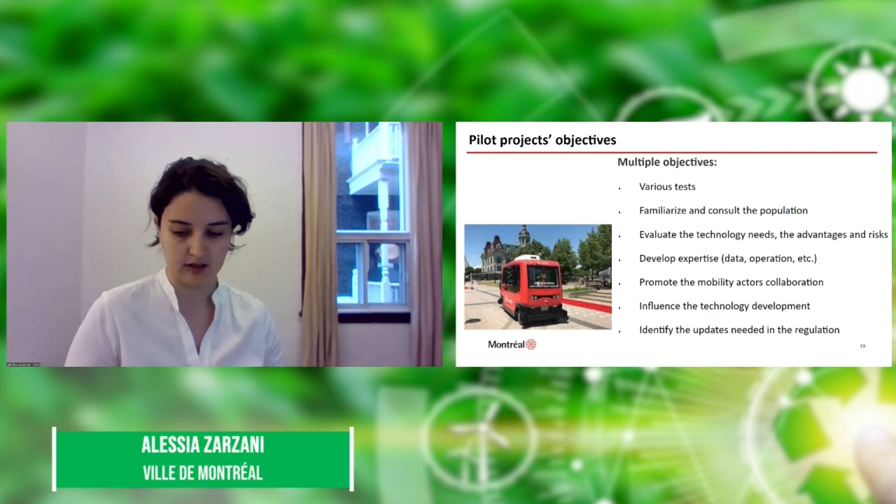So the city developed 3 different projects: the first in a private site, the second in a residential area, and the third, shown here, in a commercial street, Plaza Saint-Hubert.

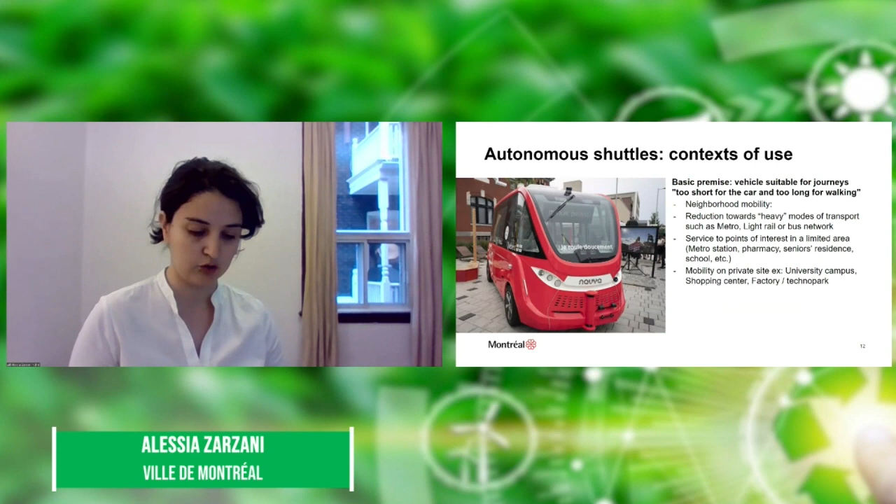The autonomous shuttle's basic premise for this technology, and why we tested it in the commercial street, is because the trip needs to be too short for a car and too long for walking. So we developed different phases for the project.

The preliminary part is in collaboration with the MTQ for the security of the trip and the zone of the pilot project. The first phase is to better understand the technology, and it's right now in the street. The second part is to better understand citizen usage.

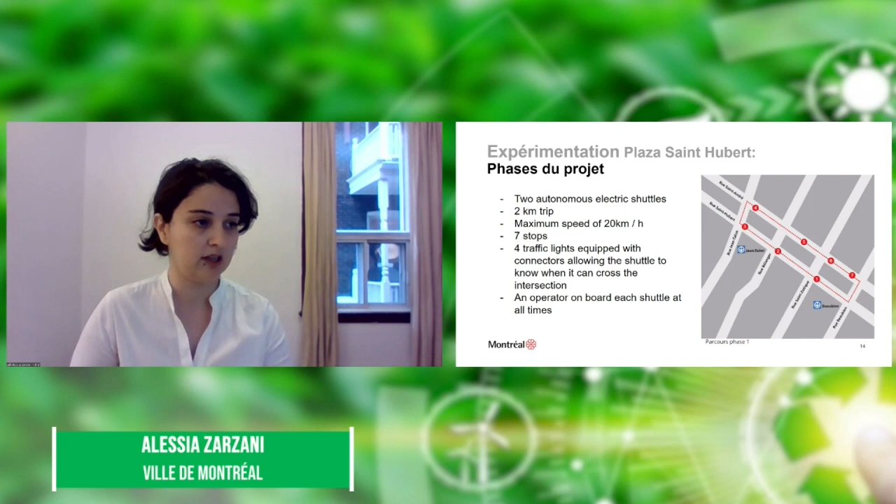So this is the zone. We have two autonomous electric shuttles, a 2 kilometer trip, a maximum speed of 20 km/h, 7 stops, 4 traffic lights equipped with connectors to allow the shuttle to know when it can cross the intersection, and an operator on board each shuttle at all times for security.

So to allow citizens on board, we used COVID mitigation measures for this phase.

So when you come to Montreal, we will be glad to welcome you on board.

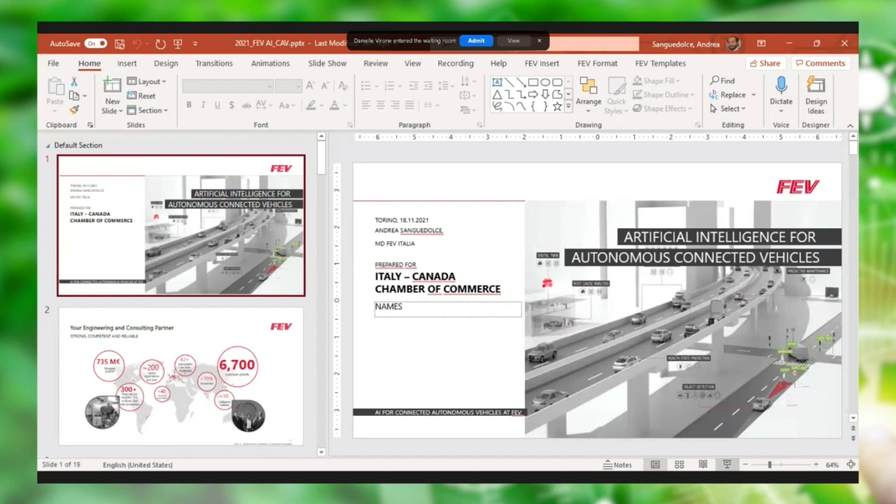Okay, perfect. So good morning and good afternoon, ladies and gentlemen. I would like to thank the Italy-Canada Chamber of Commerce and Regione Piemonte for giving me and FEV the possibility to share with you our vision about future mobility and artificial intelligence.

Let me start by presenting FEV at a glance. We are an engineering company, partner of many OEMs and very relevant tier ones and other players within future mobility development. We have a global footprint. Revenues referred to here are from 2019, since 2020, as you can imagine, is not a reference year.

But in this moment, the development for future mobility is really high among all our customers, so we are really catching up and even growing. We have more than 300 laboratories around the world to do our jobs. We are definitely an engineering company, so more than 70% of our employees are engineers, or in any case educated through university, with more than 200 patent applications per year.

And so we have the luck to work with all the important developers around the world, plus we have many internal projects. You see here how we operate.

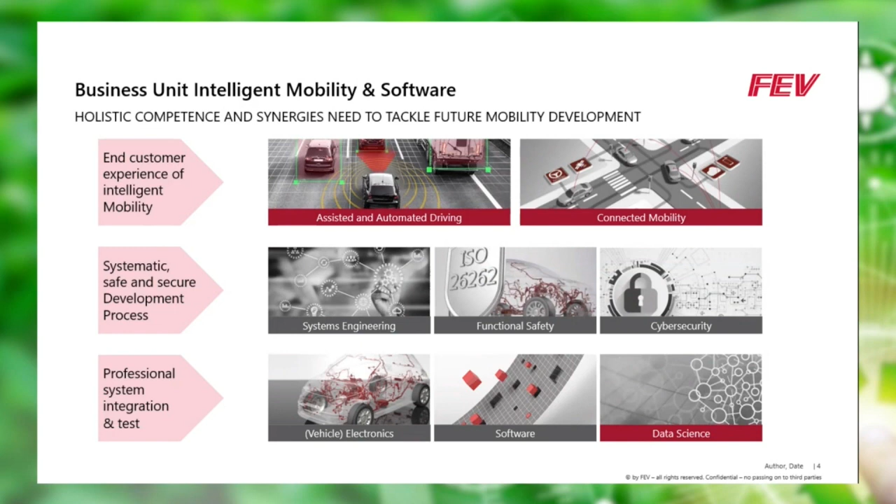We are talking about deep learning. Even for me, the difference is not so clear sometimes, but we say deep learning is when you use a model to predict something. Machine learning, you have model and data. And the big difference to reach artificial intelligence at our level is that it usually requires human intelligence. You want to reach the level where from the data you can extract value and decisions that can be taken by human intelligence. This is a relevant difference between machine learning and artificial intelligence.

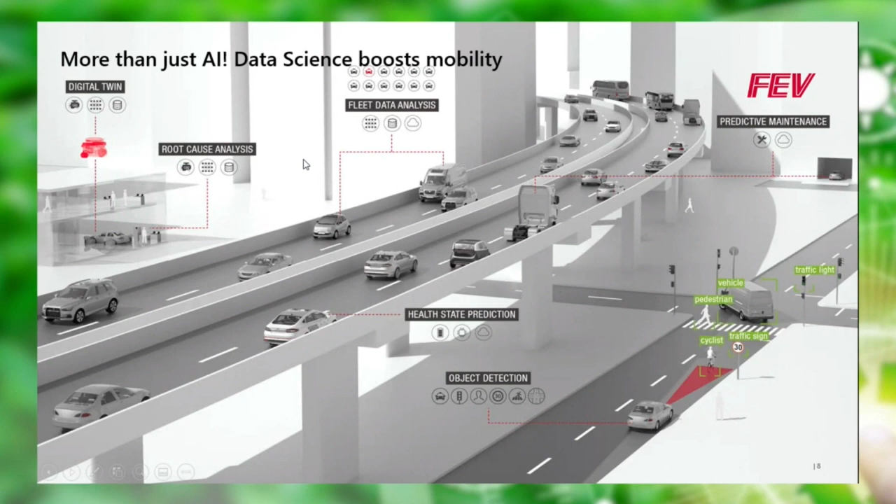This is just to visualize a bit some of the applications we discussed. This vision is a bit more cold than the one presented by Mrs. Zarzani, but you see different types of mobility, highway or urban mobility, and this requires totally different development in terms of functionality. But all these use cases need artificial intelligence as an enabler to arrive at the implementation of the functionality.

This is a bit more interesting. This is an example of projects. In FEV, as well as internal projects, we work for our customers. This is an example of testing and validation of ADAS and AD functions. We are talking about more than level 3. As we know, more than level 3 means you can stay hands-off for some time in controlled environments, for sure not in all environments, and even have your eyes not looking directly at the street for some time. To do that, you can imagine it's quite ambitious. From the technology point of view, they are available, but then you need to be able to test and validate that this can be put into production, and that the customer is safe using it.

An example: you need to have prototypes for sure. Sometimes you collect a lot of data, but then you need a kind of digital twin or platform where you identify your driving scenario. That can be downtown Bologna. We have, by the way, in Bologna, a laboratory developing this kind of functionality. We are doing some work with the city, and there we are modeling in some way the scenario of downtown Bologna. Then you need to identify corner cases, weakness detection, and so on.

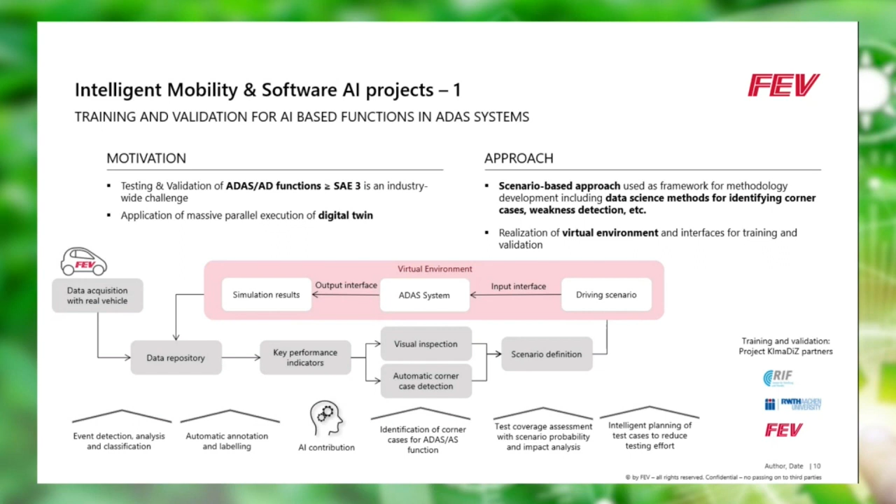To do that, we acquire data, and then we use our virtual platform for driving scenarios. You have the input interface to the other systems, and the output simulation results. What you can do is improve your functionality, and the loop can go again and again, saving a lot of time on testing that would otherwise be done in real life. Prototypes are very expensive, so we move this into a more virtual environment.

So this is something that we are testing and that we will see for sure in the future.

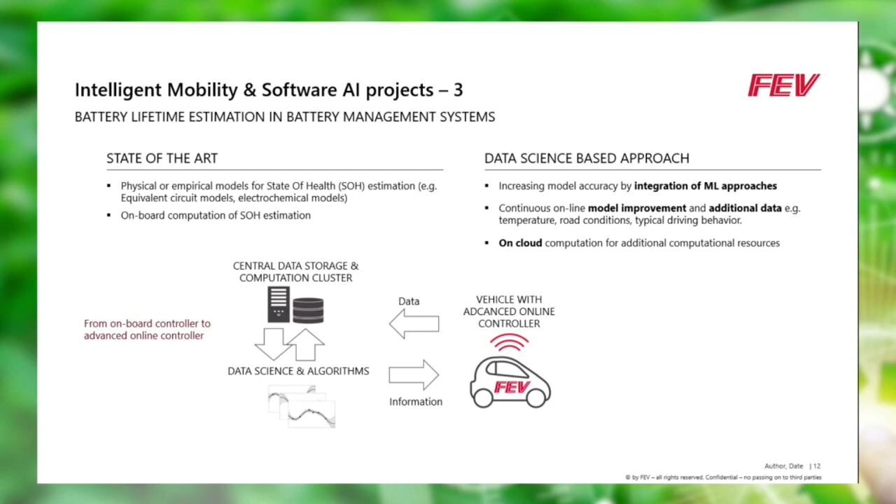This is very important because, for example, imagine that one day, even today, you have a hybrid vehicle in some downtown city, and there's a geofencing zone. When you pass this geofencing, you can deliver information about your range and state of charge of your battery, and then they will decide if you can enter or not, based on whether you have enough range to drive in the city without any problem.

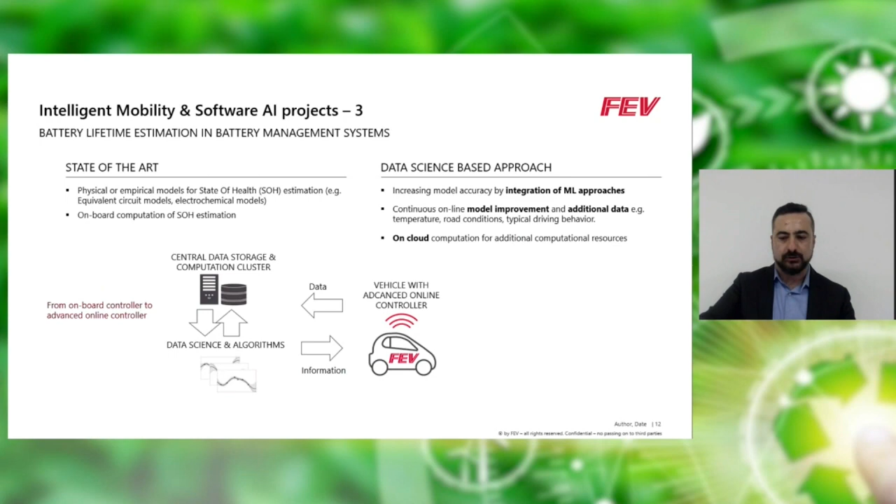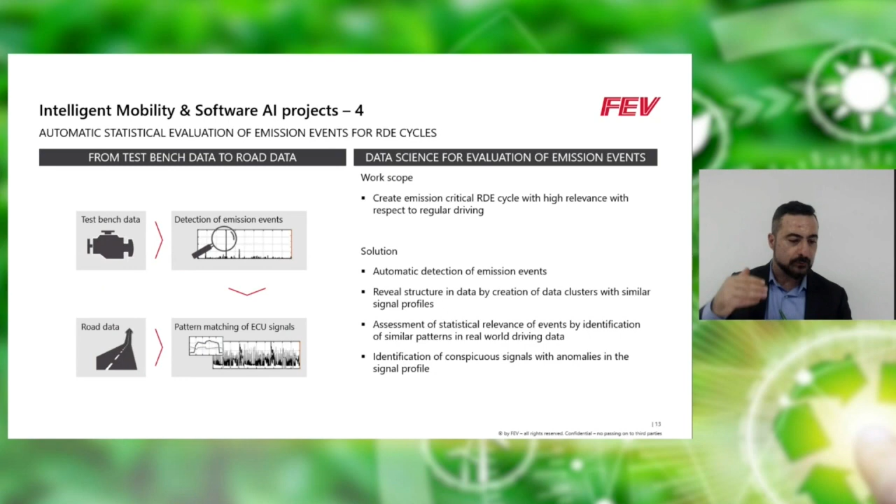So there are really many applications related to this functionality. This is an example related to development. We use this at FEV to analyze engine test bench data where we test the powertrain, and then data coming from the vehicle we test on the road. We can put together this data, and with the right modeling and artificial intelligence support, we can shorten the development time and come to a conclusion to improve the functionality much better.

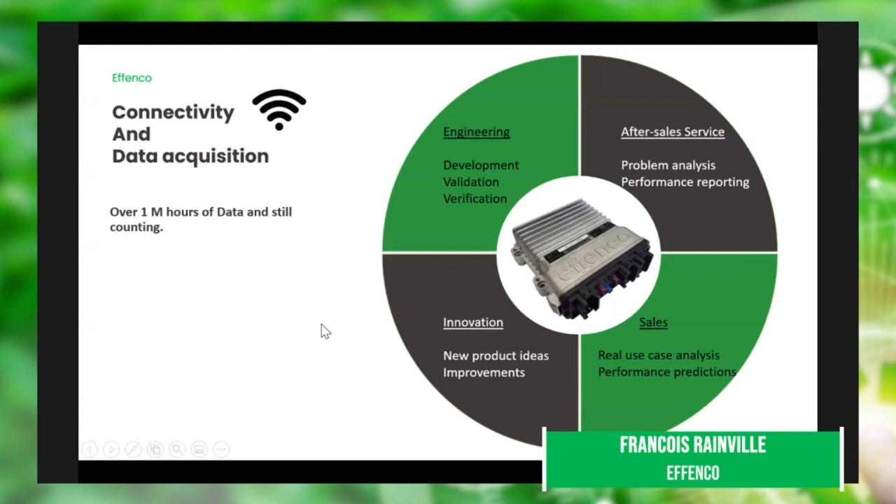As you probably all know, one of the big challenges with artificial intelligence is to have access to a lot of data and quality data. At EFFENCO, we started collecting data on vehicles more than 10 years ago because we were a very small team at the beginning, and our market is worldwide. We needed a way to monitor the performance of our systems, as well as reporting the performance to the customers. We can also do real use case analysis for future customers that might be interested, and we also use data for innovation.

In these 10 years, we have collected over 1 million hours of data across more than 150 channels at 20 times per second. We have connected 400 vehicles at the moment, and it's still counting. We reached 1 million just in September. It's a fun fact.

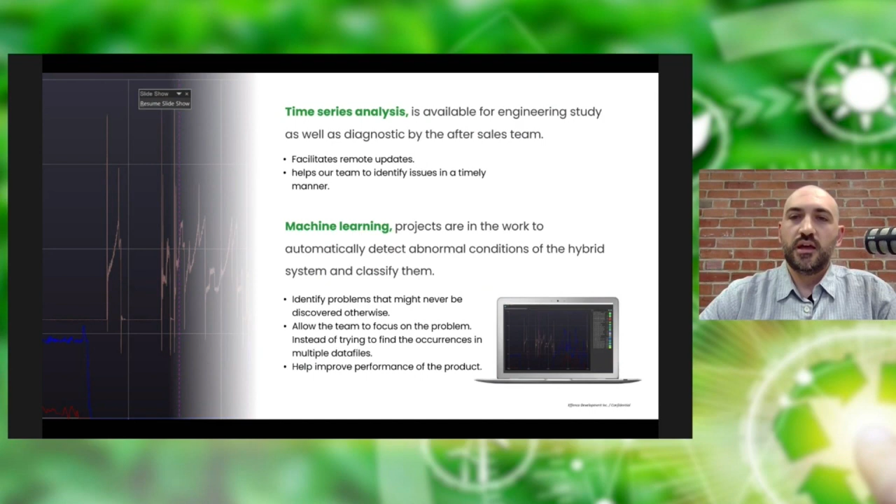The first area where we use data is the after-sales service. Our service technician and engineer team needs a way to identify problems either on the system or on the vehicle. The data is really the best tool for them to find issues when working remote from the customer location, and they can pinpoint the problems and send the right tools or the right parts to do the fix to the destination.

We can be more efficient this way. Because the system is connected, we can do remote updates, and it helps a lot on the deployment of different fixes. We are currently working on a machine learning project to detect abnormal conditions in our system.

We have a decision tree algorithm that is classifying them, and then the service engineer can first look at this results and identify if it's a known problem or if it's a new problem. Then we can focus the right resources to address the issue.

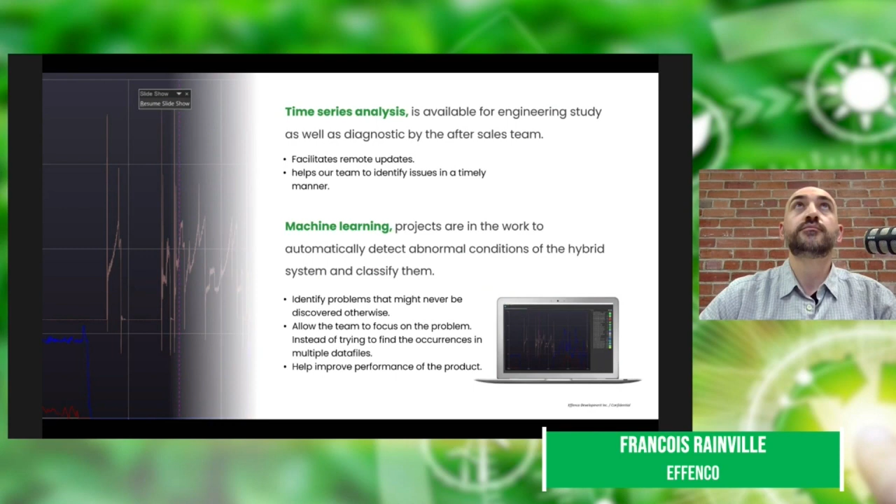Another very important use case for our data is the performance report for the customers. Because we have a new technology, customers want to make sure that their investment was worth what they paid for. So we do advanced performance reports for them, and we can show that the system works, and it reinforces future sales with the same customers.

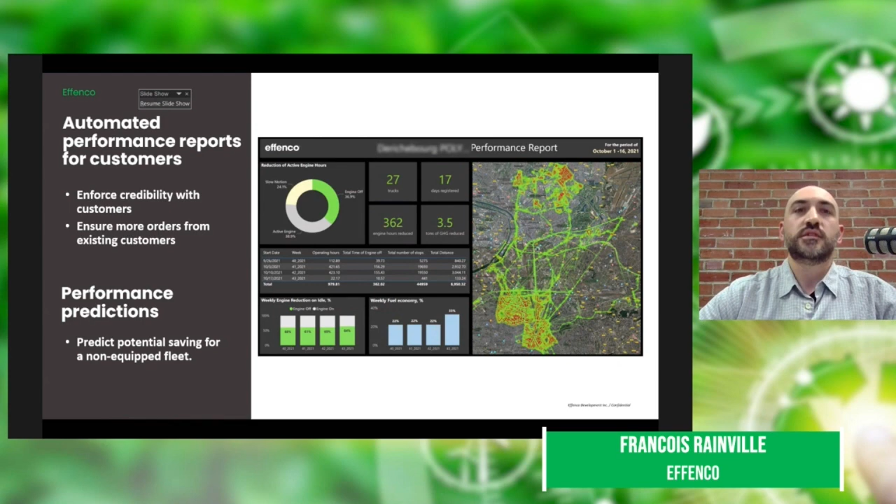So this is an example report that you can see. Sorry, I have a problem with my multi-screen setup.

On the engineering side, we are working on a future system that is a fully electric powertrain for a heavy-duty vehicle, but with a very small onboard energy capacity. The goal is to have a vehicle that is the same cost as a diesel vehicle, but emission-free.

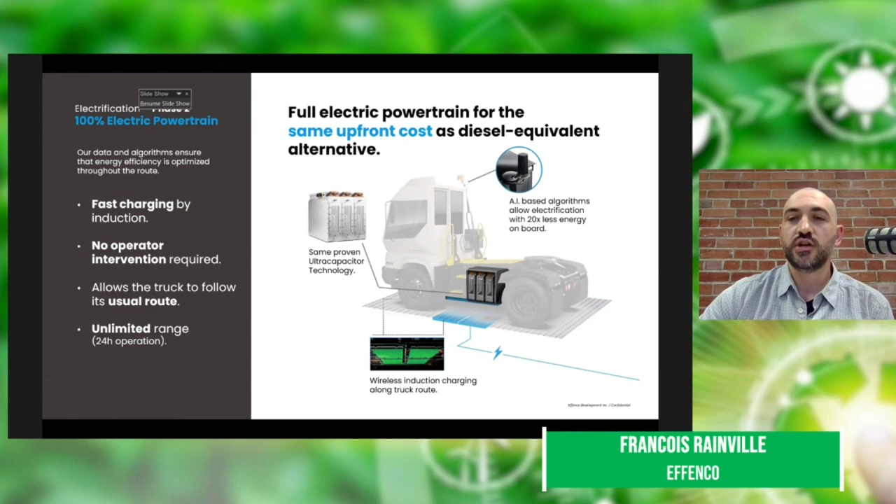So what we need to do for this is minimize the onboard energy, but we also need to charge the supercapacitor, which is our energy storage, very wisely. So we are working on an algorithm to place the charging station strategically, depending on the use case of the customer.

And what we provide as a solution is a path to fully electric. So the first step at 30% is just by buying the vehicle. And the 50% step is when we start to implement charging infrastructure to their fleet.

As time advances, we add more charging stations until the whole fleet is 100% carbon neutral.

So this is kind of an explanation of what this algorithm is doing. We use the collected data to simulate what would happen in different charging locations. We do some optimization. Once the solution is chosen and it matches the requirements of the customer, we can implement that on the fleet.

And once it's implemented, we continue refining the model, and we work on the next steps in this path to the fully electric fleet. So let's say the first year he has a specific budget, we could implement 10 vehicles.

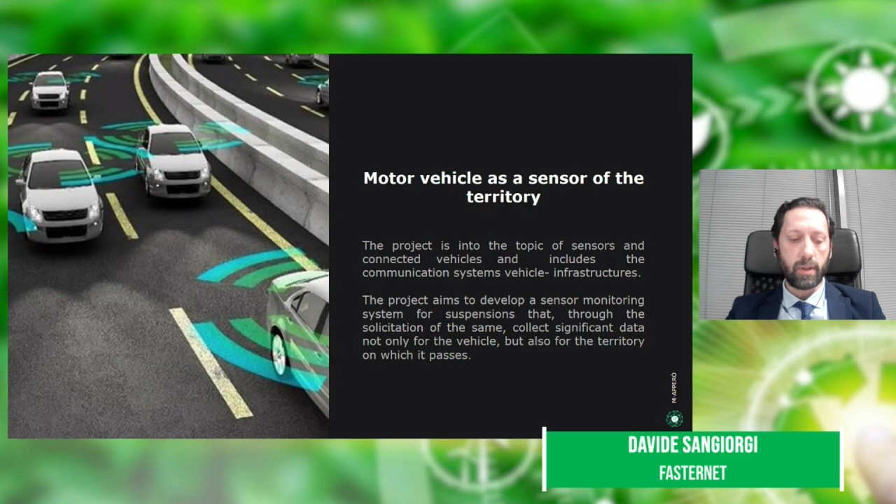The project aims to develop a sensor monitoring system for suspension that, through the solicitation of the same, collects significant data not only for the vehicle, but also for the territory on which it passes.

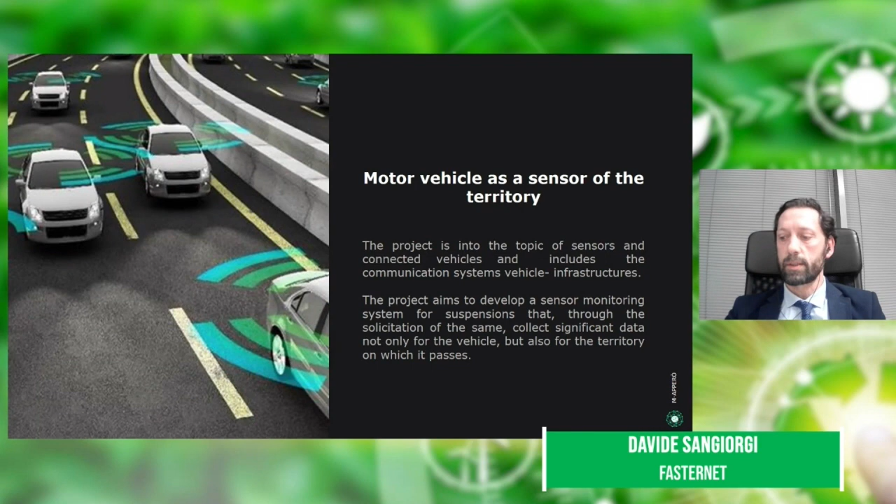The goal is the use of motor vehicles as a sensor of territory, and the use of motor vehicles as provider of big data. Black boxes and other devices are used to process and store real-time signals, especially from accelerometer sensors.

The test is done by the province of Brescia, and many data are collected from vehicles through data providers. The partners of the project have installed sensors into several vehicles and/or use data collected by sensors to validate the method of the province of Brescia.

Big data are used to support decisions to improve safety and sustainability, optimize maintenance costs, and develop the infrastructure for the interaction between vehicle, infrastructure, and environment.

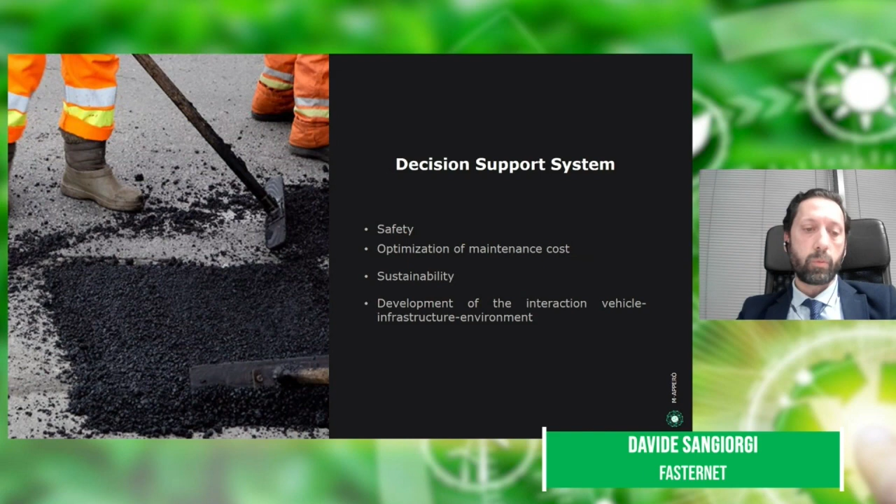All the data are collected and orchestrated in a known cloud system. The choice is to use a cloud orchestrator system to improve independence from the data managers' providers. Data collected and analyzed provide a wide range of information, increasing the added value of the single information. For a better representation, data are aggregated through tailor-made solutions according to the customer experience.

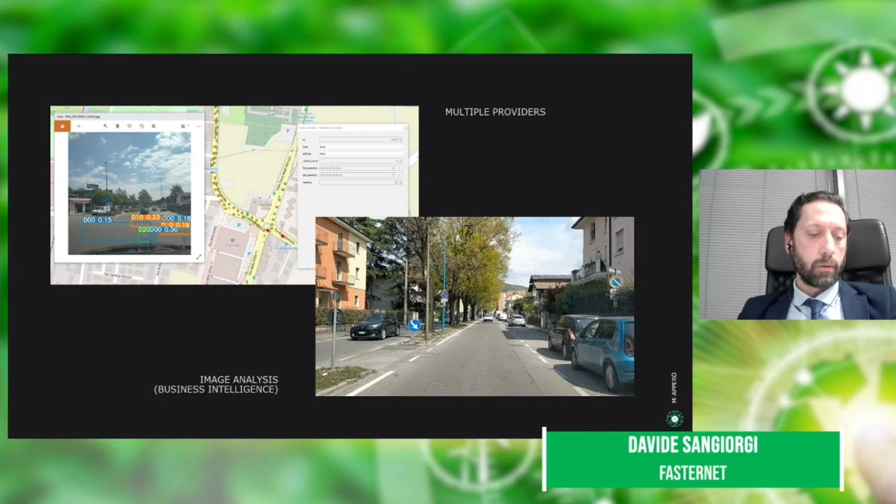In this slide you can see another sample of GPS data collection. In this part of the road, there are several images collected on the base map. The system includes an application to report the image.

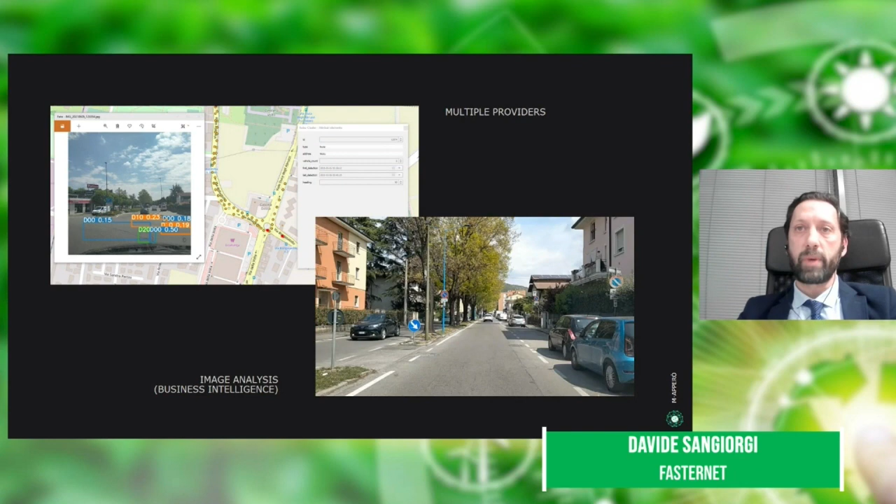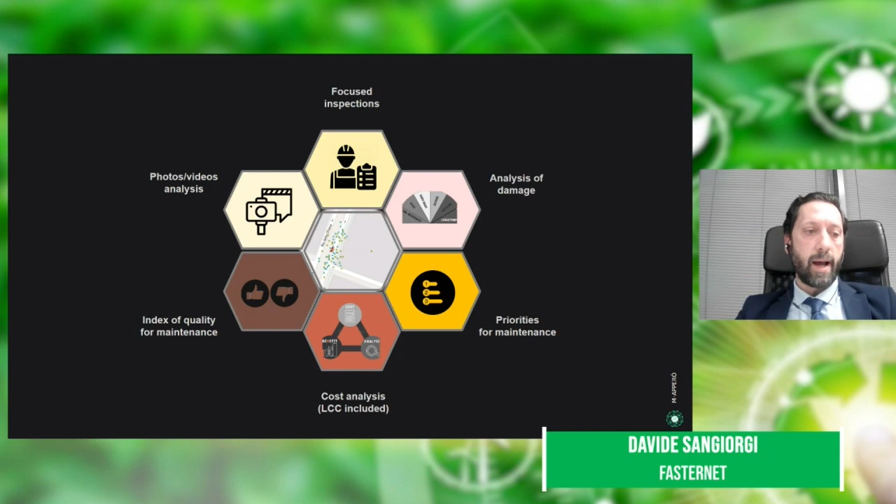There is not only accelerometer data, but also data coming from the analysis of images. Images are taken through an application based on AI that frames the road surface. Not only the analysis of the image, but also a complete set for road maintenance are included in this system.

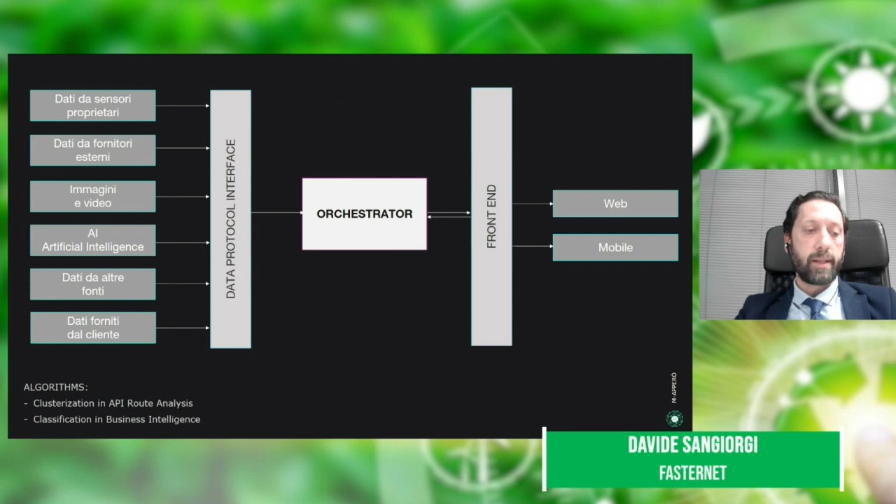The collected big data are provided from different sources. The elaboration of data is done by the orchestrator, which permits the use of algorithms such as clusterization of data. The position of data is corrected by this algorithm, and they are collected on the exact point of the road. The orchestrator returns the information to the mobile app or web interface.

We would like to promote a service of data collection through sensors that interchange with the infrastructure road system, to improve the quality of life of the city and, in general, the whole environment. The system will be, in perspective, open and shared.

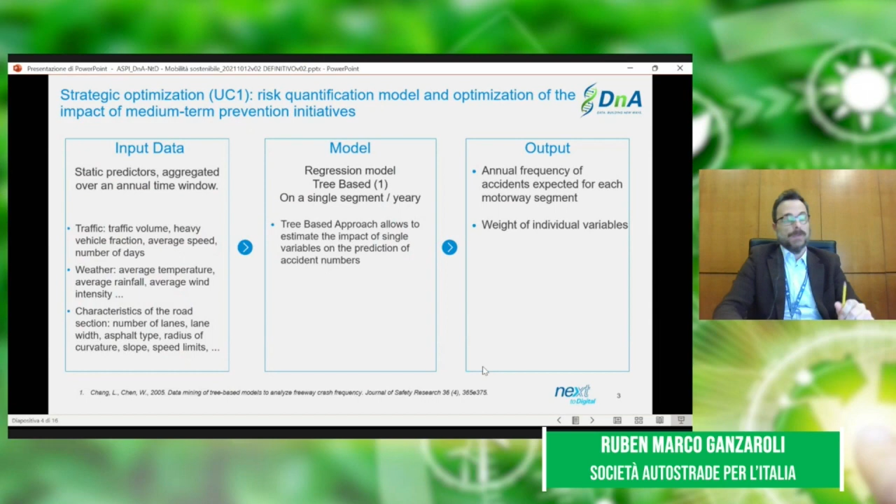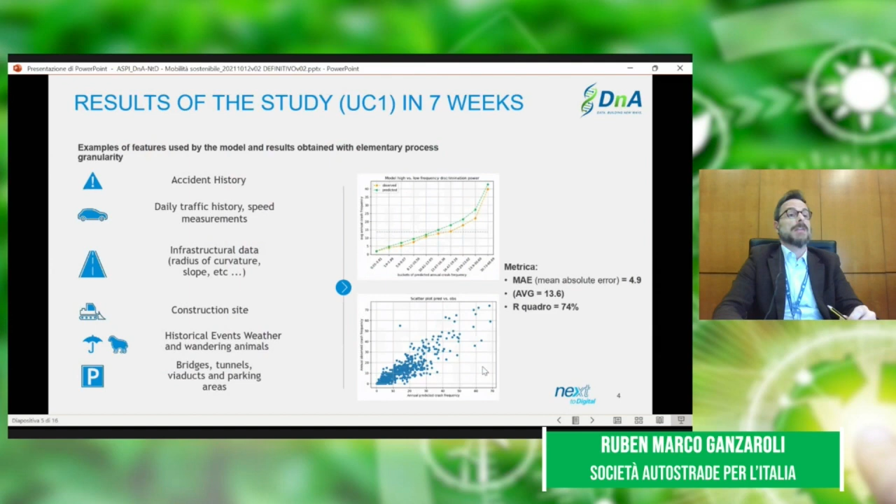In 7 weeks, we obtained as a result a mean absolute error of 4.9 points versus an average error rate of 13.6. So it's a quite good result.

But above all, we are able to understand which feature impacts the most the accidentality on our roads. As you can see, for example, the quality and the volume of the traffic are important features.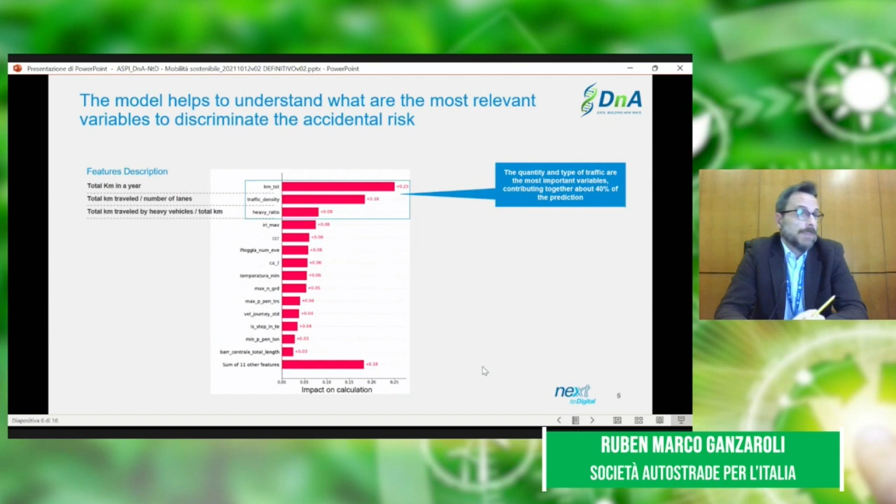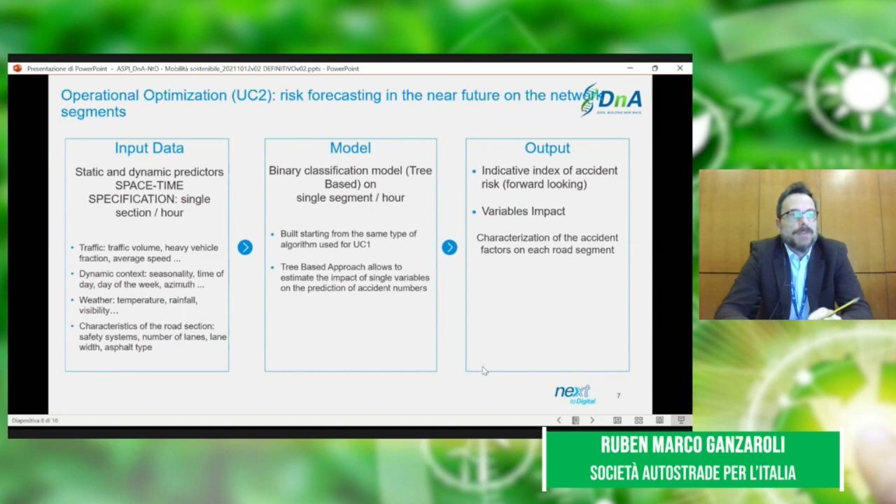And again, we wanted, of course, to have the accidentality risk forecast on a specific time frame and the variable impact again. So basically, if we wanted today to forecast the accidentality index on a specific street for tomorrow at 4 p.m., we just input the data.

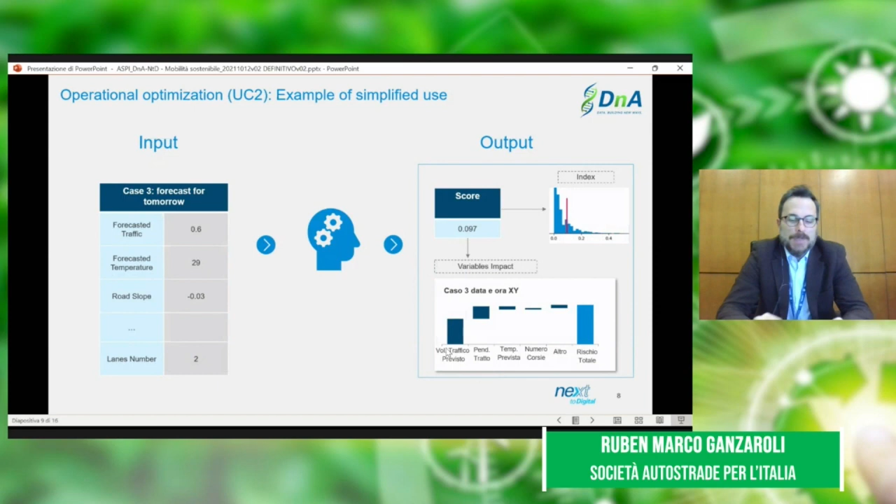Forecasted traffic is basically the forecasted volume. Forecasted temperature, 29 degrees Celsius, the road slope, the lanes number, and we can have the accidentality score pegged on tomorrow, on that road, tomorrow at 4 p.m., pegged by each variable, pegged by the impact of each variable.

And another interesting feature of this tool is that we can have a complete map of our infrastructure. In the example, you can see a map for 3 days. It's not Tuesday, of course, it's Thursday. Sorry for the typo, but you see from Thursday to Saturday all the motorway infrastructure based on our sections.

Of course, the graph is navigable so that you can deep dive the analysis when you see red, for example, in order to understand if there is something that you can do to reduce accidentality risk in that specific time frame.

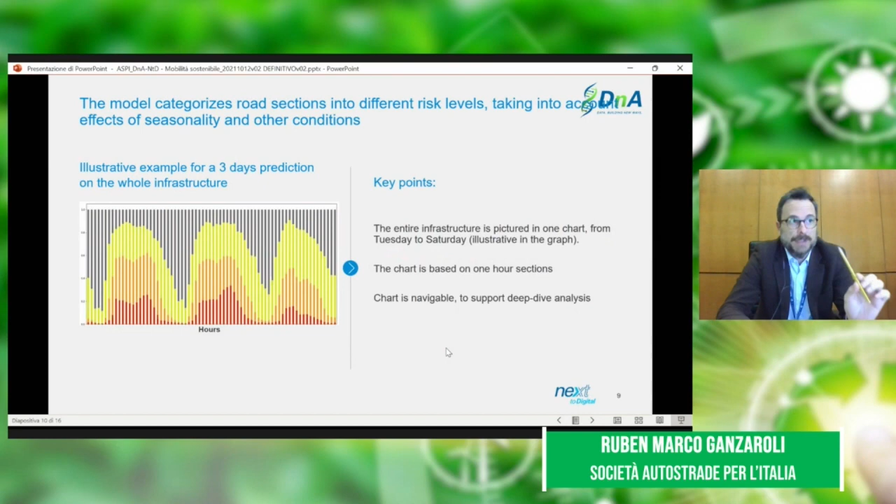Of course, this is the starting point, but we are developing the full environment because it's our core environment. So basically we can use this tool to boost flooring maintenance, supporting the identification of sections to improve quicker due to accidentality, construction site planning, and accident management.

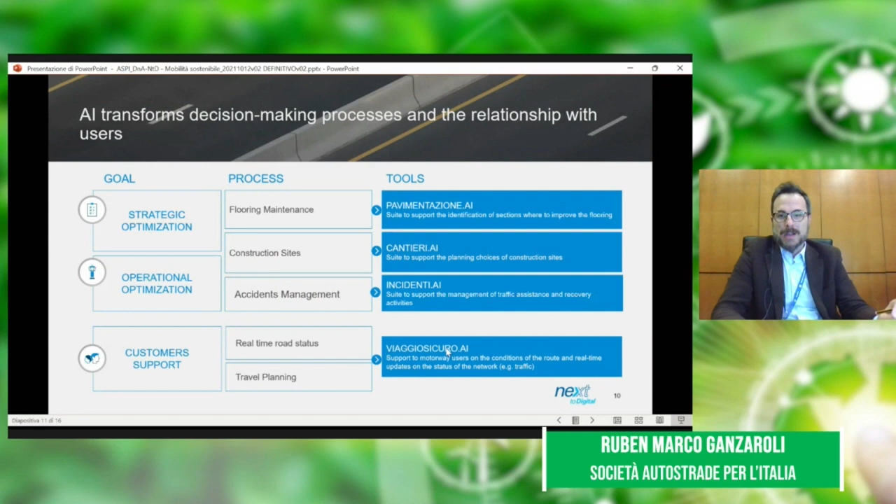Imagine that if you can foresee that on a specific road tomorrow the accidentality risk is higher, then you can put a safety car in that area ready to catch and support a potential accident. Then, of course, customer support, because we want to give our customers the real-time road status and allow them to schedule their journey so they are comfortable and smooth.

Of course, we have other use cases, not only about accidentality. We have expected travel time, which is basically a name, but the tool is something deeper regarding traffic analysis. We have a lot of data about traffic and can integrate this data with other features to understand each aspect of our core business. This can lead to estimating the impact of each feature and putting in place actions to reduce the impact of whatever we perform or whatever issue we could have on our infrastructure.

Of course, we are doing a lot of KPIs. We have a huge number of financial KPIs and a huge number of HR KPIs. We are also collecting and managing automation of KPIs for asset management so that we have navigable maps, so that we can optimize the travel of our company cars.

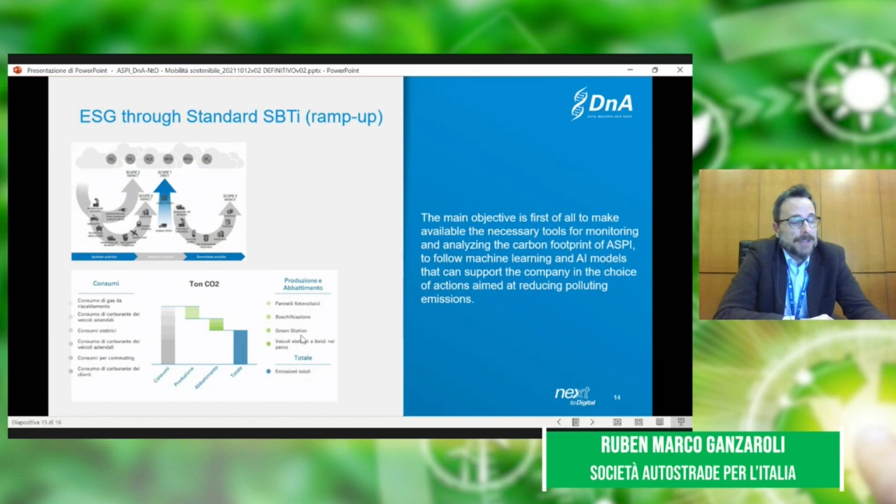Well, that's all—10 minutes are not so much, but well, it was very insightful. Actually, it's a very practical demonstration of how you use the data coming in from your infrastructure. Thank you very much.

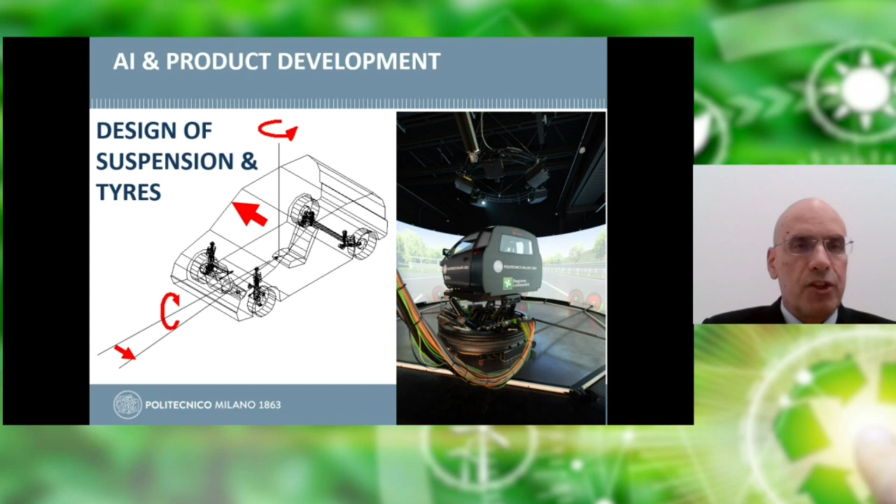Okay, let's come to the AI topic, which is the topic of this session. Actually, we started using neural networks and machine learning techniques to design the suspension systems of cars, starting even more than 20 years ago. Of course, the computer programs at that time were not so powerful as the ones we have today, but we did manage to tune the suspension systems of both current production cars and racing cars, Formula One.

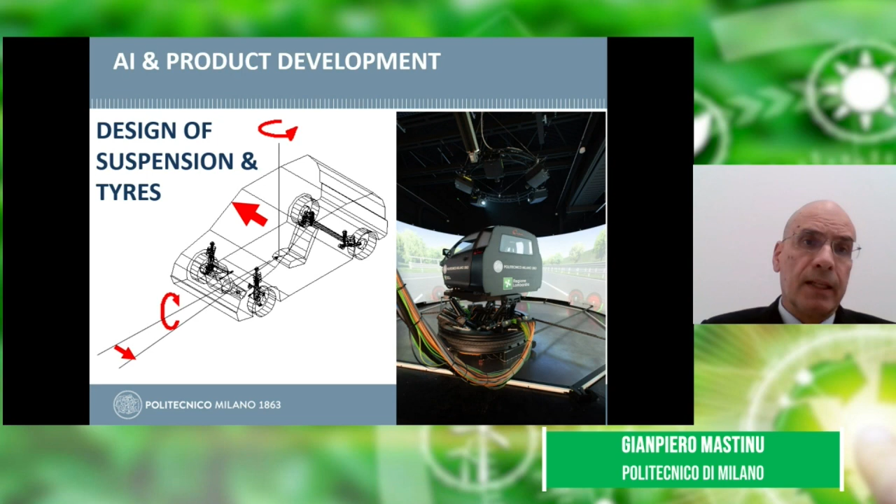The topic here is to design the suspension taking into account a number of different parameters and tires at the same time. Of course, nowadays we use a driving simulator in order to include the actual subjective feeling of the driver.

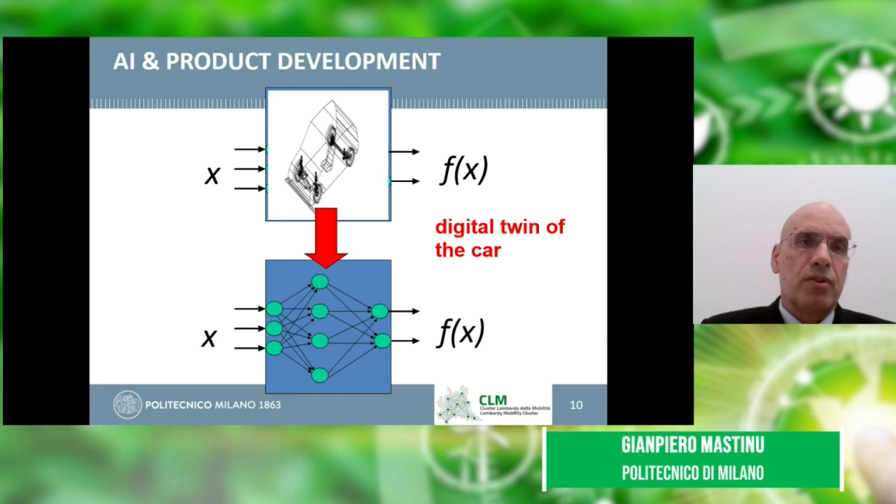What we do: we substitute the physical model of the car, derived by writing a number of equations coming from the mechanical model, with a simple neural network that establishes the same relationship between the design variables of the suspension system and the objective function or performance index. So by means of the neural net, we have the same relationship between the design variables of the suspension system and the performance index of the car.

Let's come to the results. In one of our last exercises, we managed to optimize 72 parameters describing both the suspension system and the tires, considering 38 different performance indexes that refer to active safety, comfort, noise, and subjective feeling of the driver. This, of course, is possible by resorting to AI only. A normal designer is not able to cope with and consider all of this complexity in one shot.

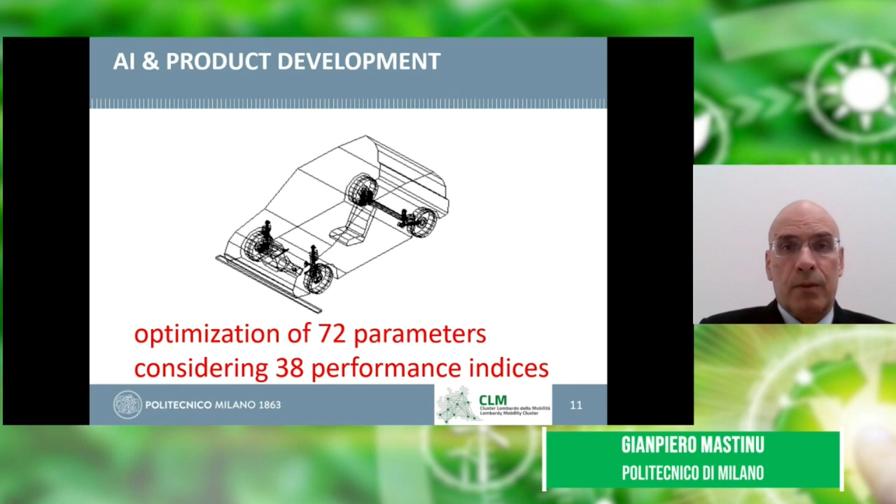Okay, so AI is also very much important in process development. There are a number of companies nowadays in Lombardy that establish a relationship between product and process by means of digitalization and AI.

Let us imagine that a component must be derived. I will not mention the component for confidentiality reasons, but let us imagine that we insert a sensor into the component while it is produced. So we can use the sensor for monitoring the production, and the same sensor can be used during the service life of the component.

During the service life of the component, the sensor will continue providing data, and by means of AI, important information on how the component is working can be obtained. This data can also be used to improve the design of the next generation of components.

This triangle has proved to be really very effective in order to reduce production cost and increase the effectiveness of the component, in terms of ability to define the actual behavior of the vehicle and the component itself.

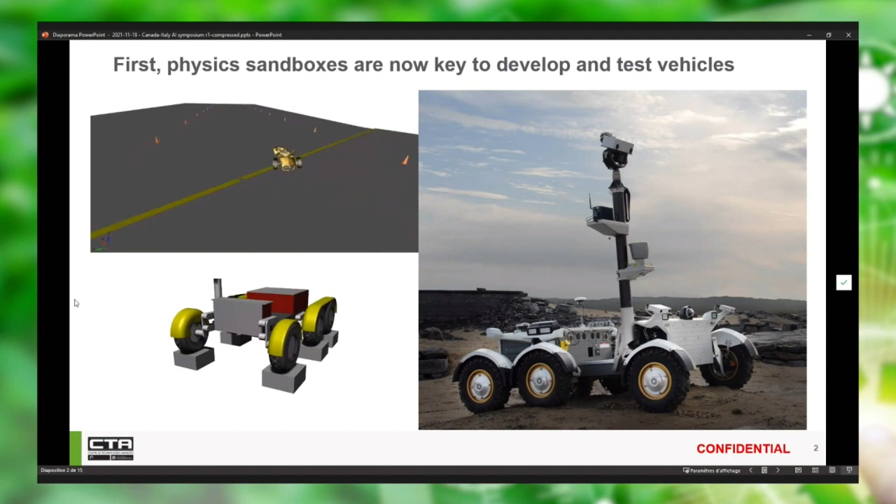Very good. So physics sandboxes are now key to develop and test vehicles. On this slide, I'll just resume and restart the first video. In the first video, you see a Can-Am Spyder moving around on a track. What's interesting about this digital twin is that the frame is actually flexible, so we can recover the different loads in the structure, even though the whole suspension, the arms and the frame are flexing.

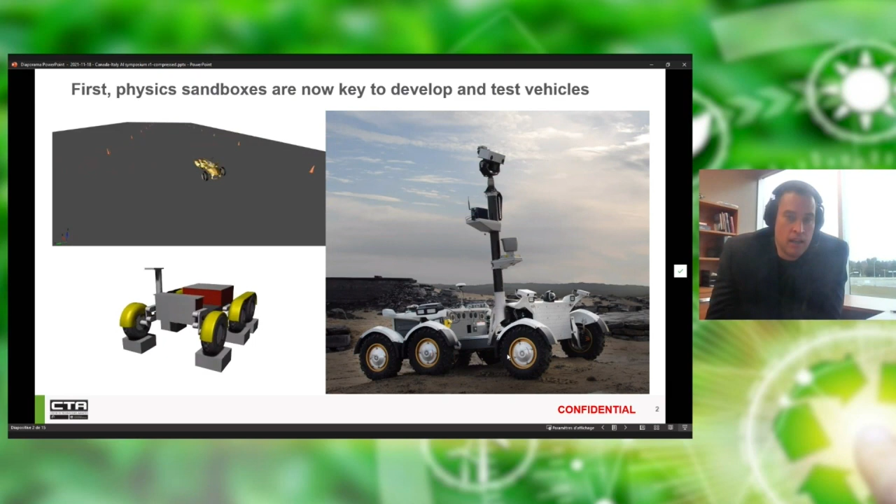That's quite important because it will affect very importantly the loads on the structure. In the second video, we see a rover that we built for the Canadian Space Agency where we do a virtual 6-post in order to determine the loads on the structure. We use these digital twins for many reasons, but one of the things we want to do is optimize vehicles—essentially design of experiment and optimization—so we can adjust suspension parameters and obtain the best trade-offs and performance.

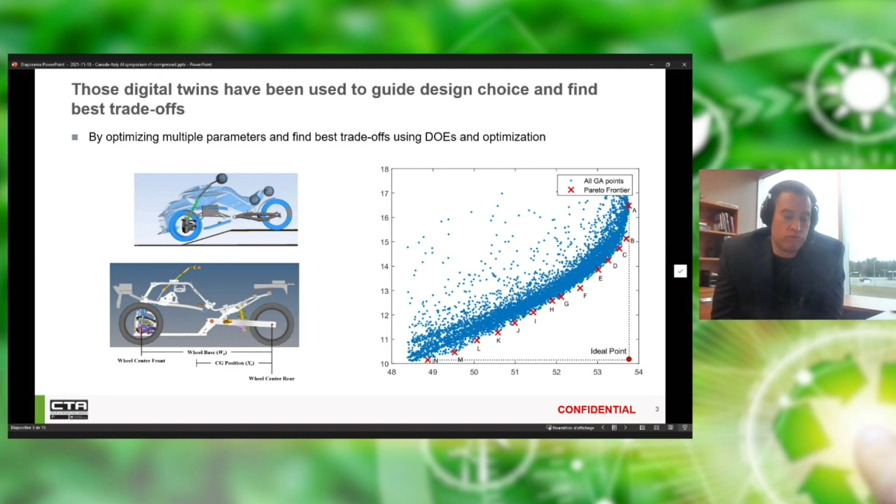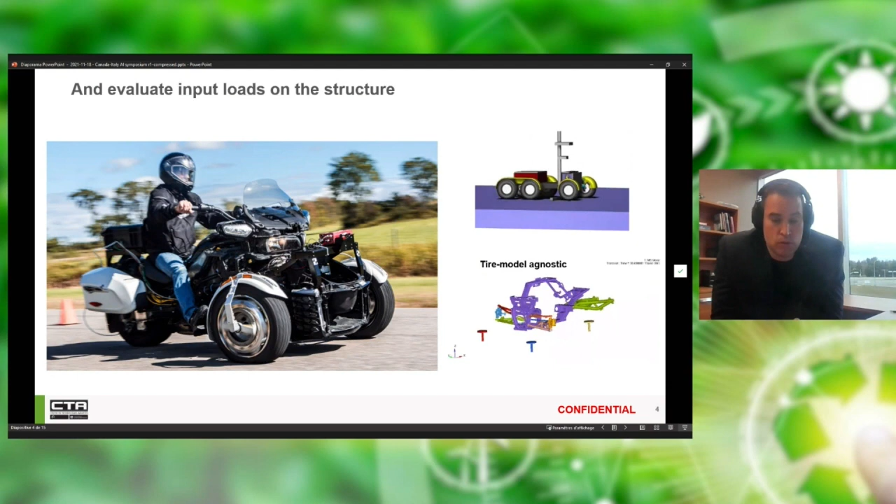On the left side, you see a Can-Am Spyder, which is equipped with wheel force transducers and an inertial measurement unit, and we can deduce the loads on the structure using those kinds of instruments. We can also make sure that we have very high fidelity in our simulation thanks to that data.

Using digital twin was essential for that project because we needed to size every single component and the different motors and the vehicle properly. Simulation was the only way to do that, because the gravity is also different for a Mars application.

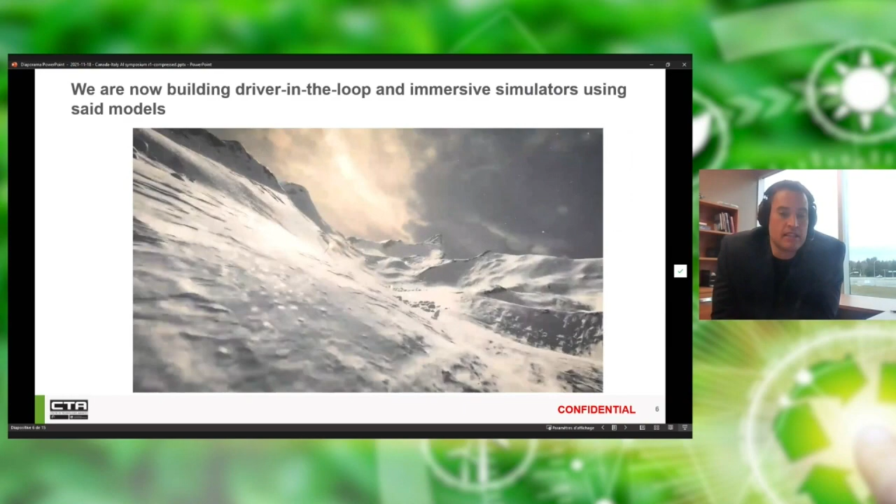On the next slide, we're showing that we're doing more and more driver in the loop. This is an example we've done with BRP, where we have an actual vehicle in a simulation and can do driver in the loop. So we have someone driving the vehicle in virtual reality, but we have a digital twin of the vehicle in a simulation, and we can even model the weight of the driver.

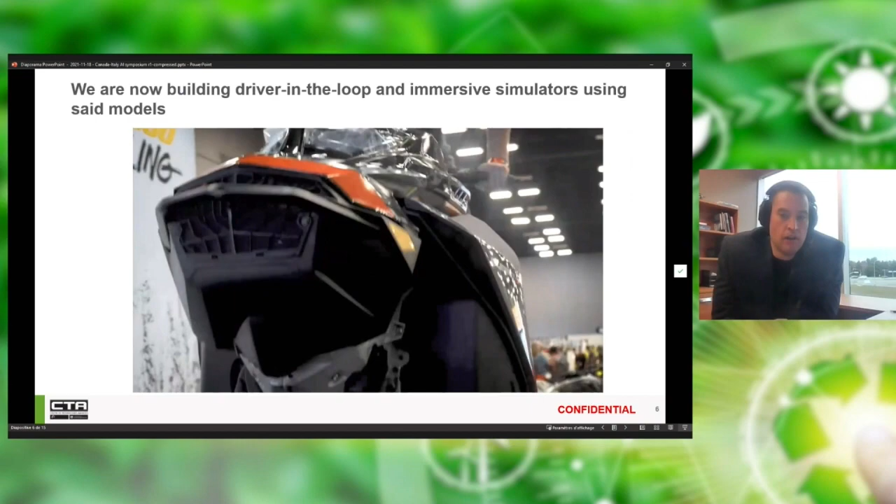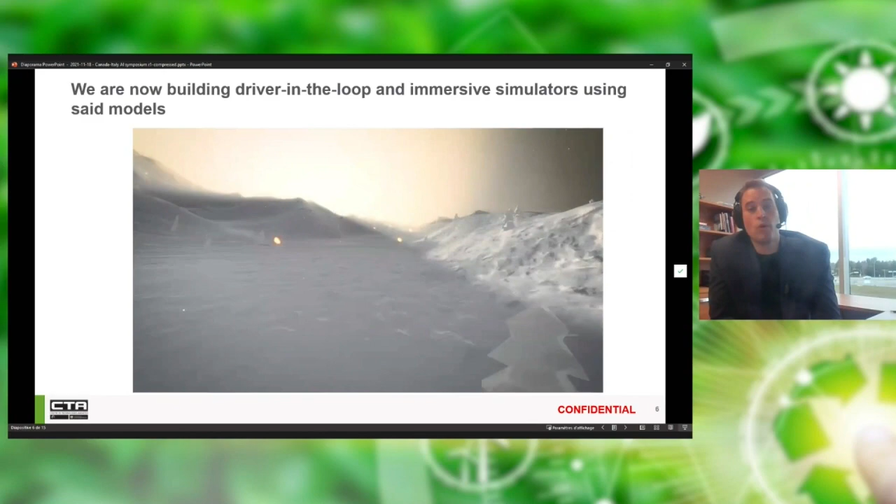By moving around the weight of the driver, we can force the vehicle to tilt and turn like a real snowmobile would. This is only enabled thanks to those digital twins that are getting more and more complex. We also use digital twin extensively to do software in the loop and hardware in the loop, to develop all our algorithms and logics. That's the easiest way we found to make sure they work properly in all conditions before going and doing real life testing.

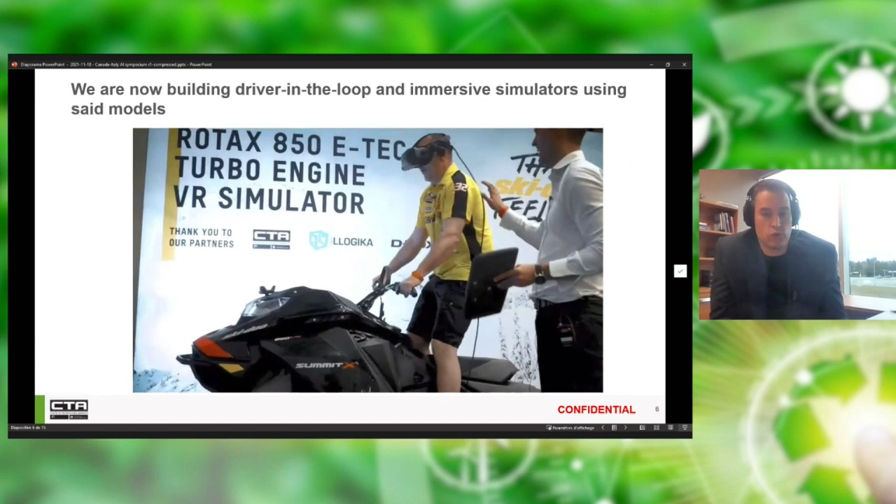On the next slide, so we talked about the digital twins and what we've been doing with these, at least what's public and what we can talk about. This is an example of AI that we use at CTA - we have here a machine learning application.

The transmission on the right side has been sold about 100,000 times - the Can-am Spyder, it's an automatic transmission. So essentially it's automated, and you can clamp the clutch here by applying hydraulic pressure. This is controlled with the hydraulic unit.

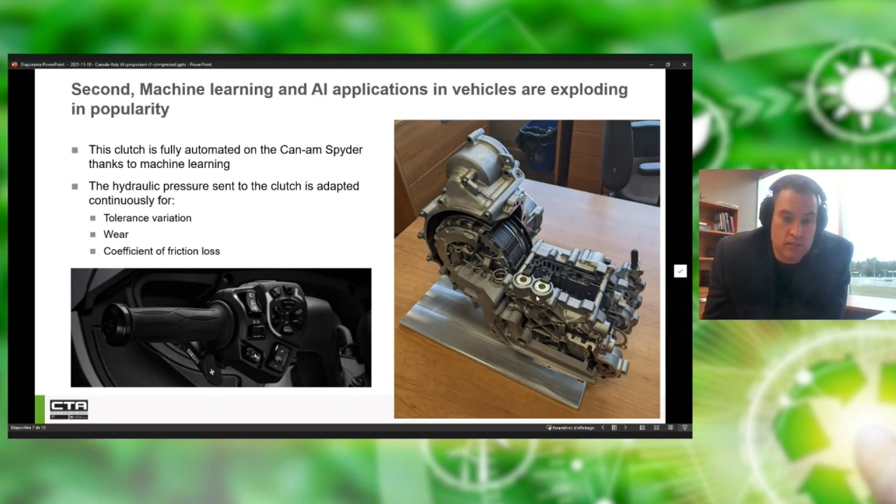We need to do AI, we need to do adaptation, because we have parameters that keep changing in these kinds of applications. We have a tolerance variation, so from clutch to clutch, from vehicle to vehicle, we will not have exactly the same stack. We will have wear, and we will also have loss of coefficient of friction.

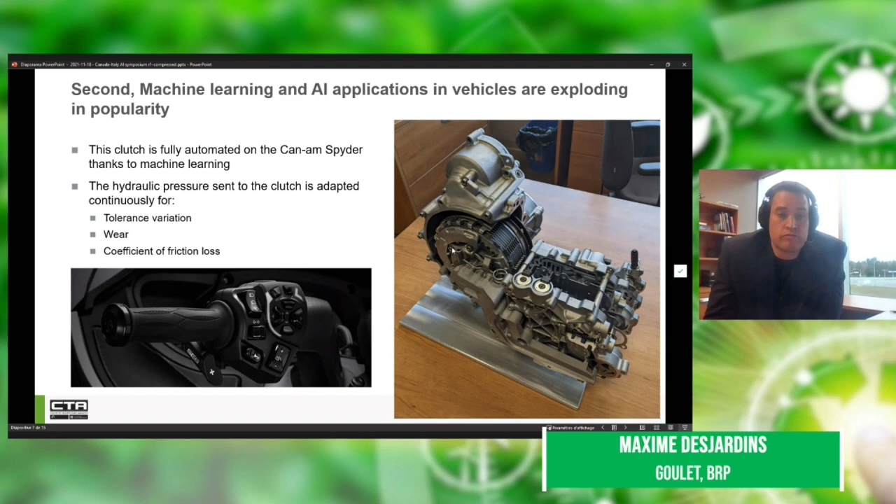So what we do here is use a machine learning algorithm to identify the slope. Every time we launch the vehicle and we have a slip in the clutch, we detect the relationship between the pressure and the clutch torque. We use AI and machine learning to understand what's the relationship between these things.

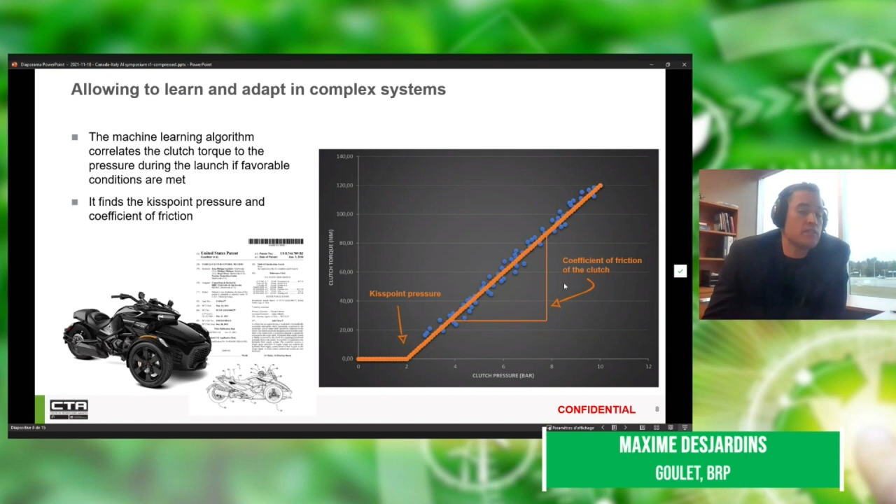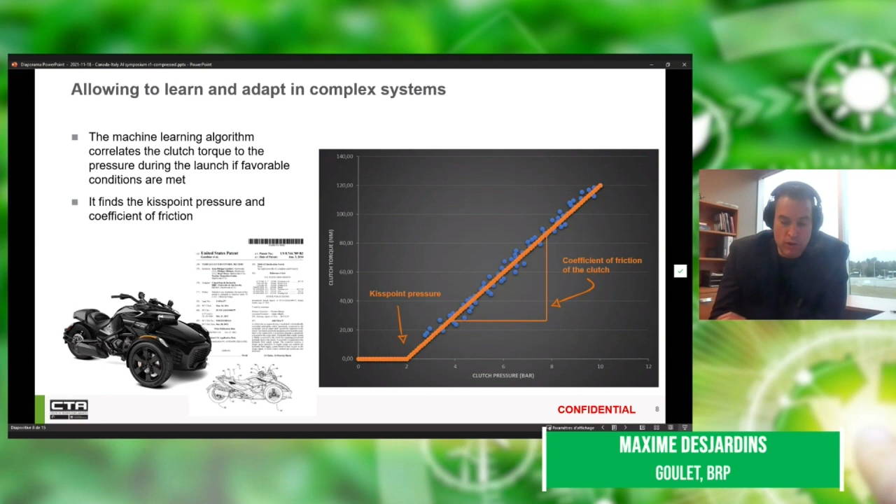And we find the coefficient of friction of the clutch and the kiss point pressure. Keep in mind this orange curve will shift to the right during the life of the vehicle because of wear, and it can shift by almost 30%. That's a big difference, and if there was no adaptation, the vehicle simply wouldn't be working at the end of its life. So we can adapt and make sure that every time the driver requests a certain acceleration, we actually provide exactly what's asked.

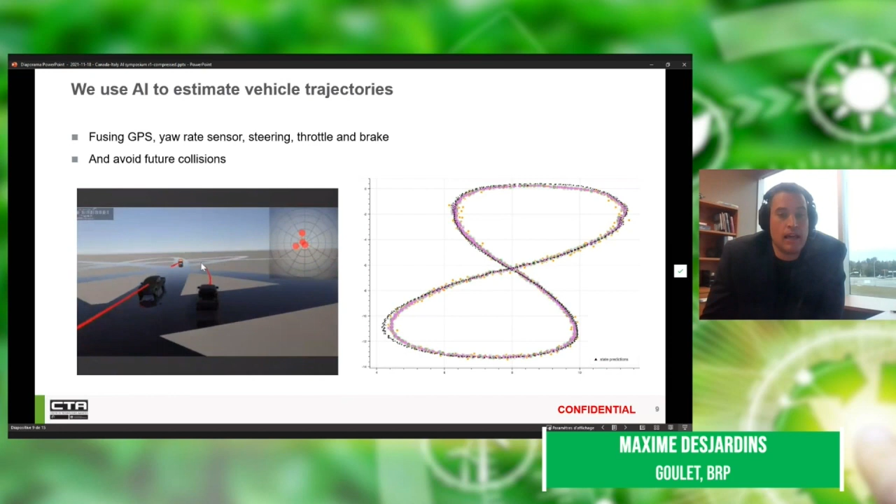On the next slide, we show how we use AI to predict trajectories of vehicles. We can fuse GPS, yaw rate sensors, steering, throttle and brake, and we can avoid future collisions. I'll also show you a more recent simulation, done in Unity, using a second-order Vold-Kalman filter to predict the trajectory of that vehicle.

We're using the information from steering, acceleration, brake, and GPS information, and we have a high frequency update of the trajectory of the vehicle. What's super interesting is that we can apply the same logic with the other vehicles around us. So if vehicles are equipped, for example, with C-V2X and/or DSRC, and they're sending basic safety messages with their speeds, location, and GPS position, we can also predict where they will be in the future.

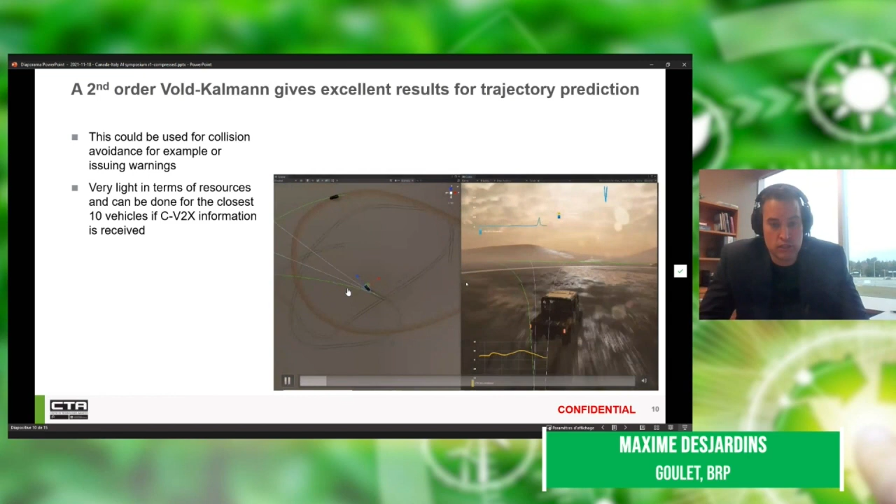And if there is a risk of collision, for example on the water or in a snow environment, on an off-road trail for these types of side-by-side vehicles, we can actually predict that there is a collision. We can warn the driver, or we can even force the vehicle to go slower. On the slide here on the left side, you actually see the trajectories of both vehicles, and we can intervene if there's an actual risk of collision that appears.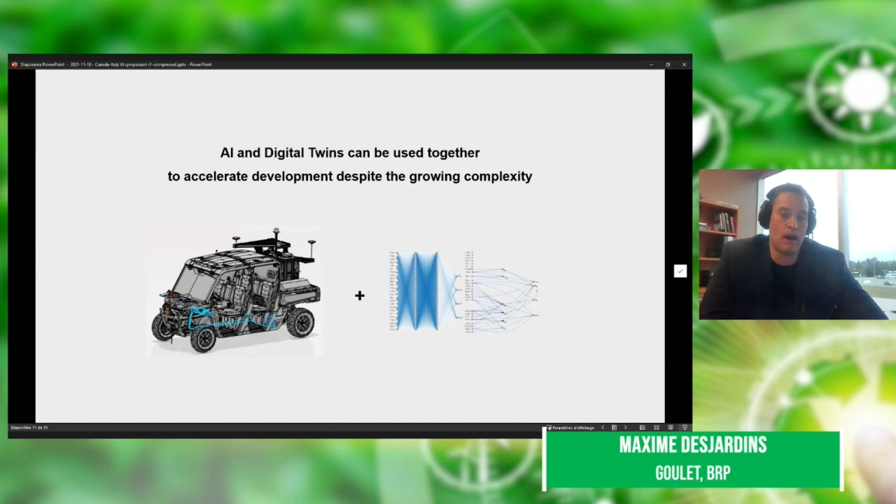Finally, we talked about how we use digital twins and how we use AI at CTA, and we can really fuse these two things. I'm going to show you the next steps for us in terms of combining those two powerful technologies for the future.

So we're beginning to simulate virtual sensors. What I'm showing here is not our own source code, it's actually LG SVL. LG SVL is capable of simulating virtual sensors in a virtual environment. It works in Unity, and you can use the GPU, the graphics card of the computer, to do the work, so we have very high quality virtual sensors in a simulation.

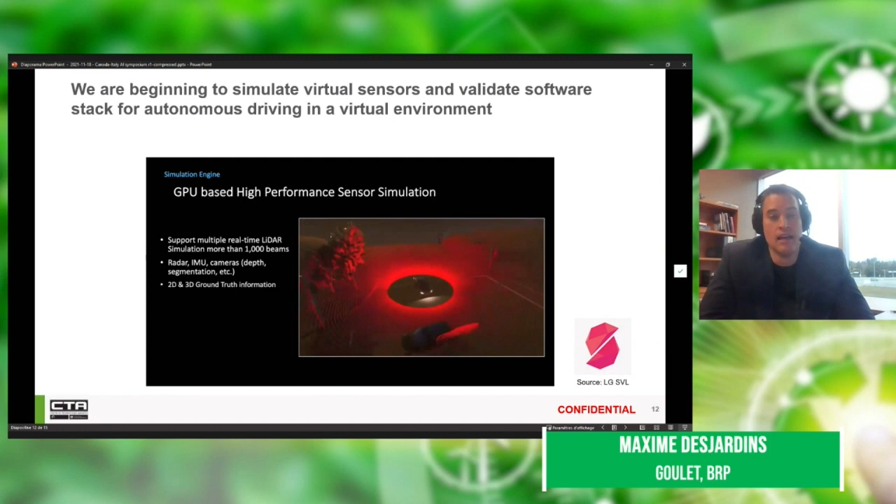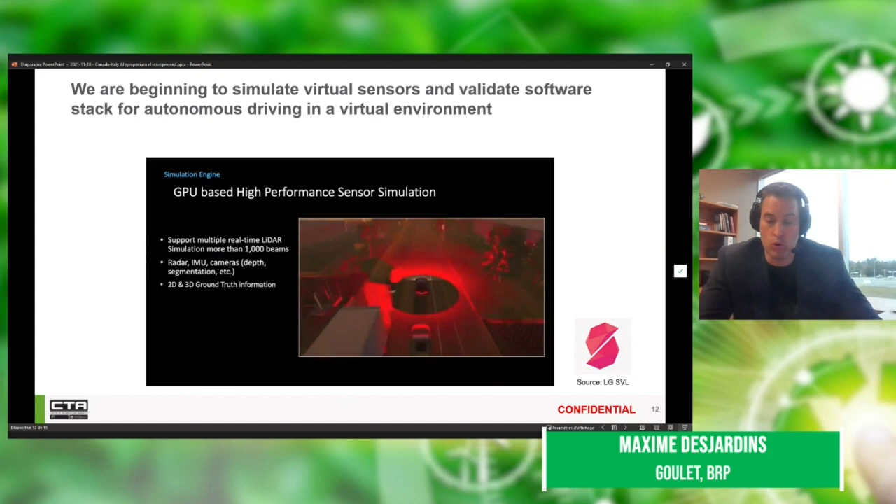What's interesting is that we can do transfer learning once we have good algorithms, and we can do simulation. We can do software in the loop and hardware in the loop as well, in order to develop capabilities for our vehicles. Our goal is to use this to eventually have bots that will drive our own vehicles.

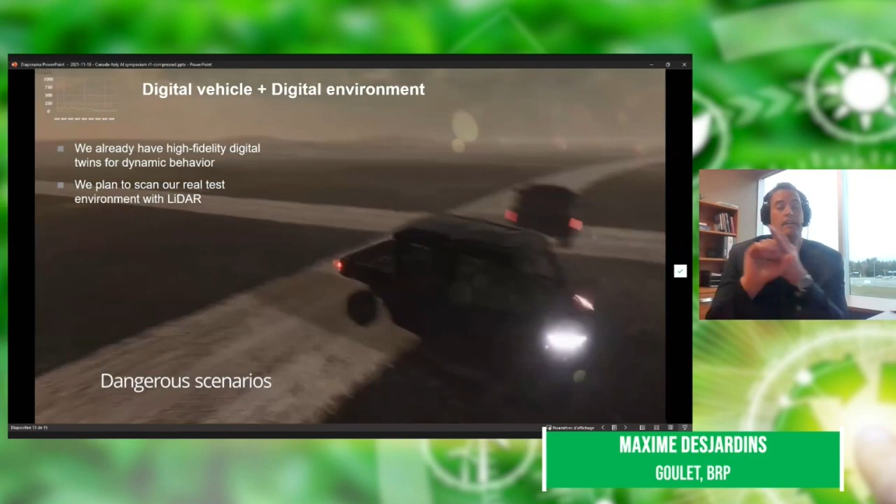So on the next slide, I'm showing you the simulation we talked about before. This is our Unity environment, and in it we now have a high fidelity digital twin. We have our vehicle behaving properly, with good physics, and we also have a digital environment. We will improve that environment by going and scanning our actual test track using LiDARs and a very accurate GPS system.

We'll be able to get a centimeter accurate map of our test track. And the intent is to move with all of that to my last slide and essentially show you what we can do.

So we can use this to develop bots. Our goal is to use reinforcement learning to control throttle, brake, and steering. We want to give rewards if we stay on the track, for maintaining high speed and scoring good checkpoint times. Essentially, there will be a mission for the vehicle.

The vehicle will have to do something very specific, such as field testing and durability testing. In our simulation, we will randomize parameters such as weight and traction, so coefficient of friction will make the road slippery, and so on. We can even slightly change the direction of gravity if we want, to make sure the trained controller will be super robust.

Once we have all of that—by the way, we'll also use cameras and LiDARs in the virtual environment—our goal is to do zero-shot generalization of that to the natural environment. We think we can probably achieve robust autonomous driving.